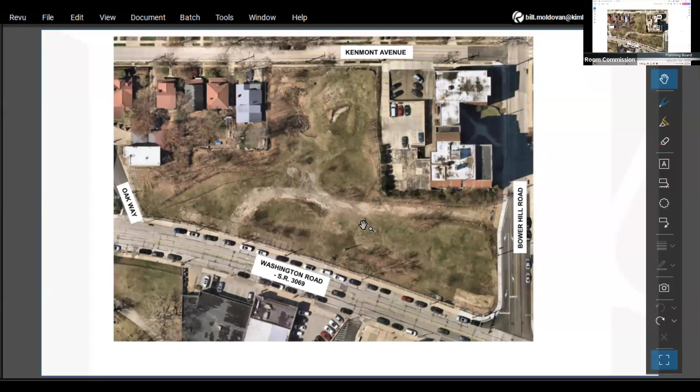It's currently in a vegetated, undeveloped condition. We also had a survey of the site conducted as part of our work in progress, shown on the following page. You can see the property boundary in dark black, again showing the boundaries to each side. This plan view shows some existing contours.

We've got elevation change. Can we get that screen? Someone's got to change the slide. There we go. We do have an elevation change, on the high side Washington Road, on the low side Kenmont. I take it everybody's familiar with this particular property, so it is a challenge from a grading perspective, but we believe our concept plan is made for this topography and this site.

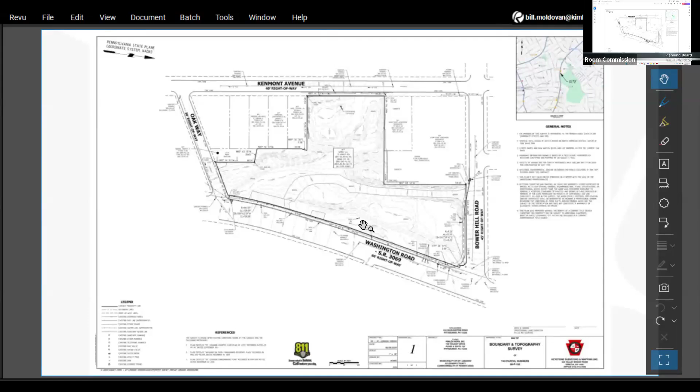We're going to show you a lot of information here in the form of plan view. We have some sections through the site to start to depict what we're proposing from a grading standpoint. I anticipate getting through all of that, and as you have questions, we can go back to some of those slides if you don't mind.

So we have a buried level of parking as the first story of the 2 proposed condo units, and then 4 levels of living. That first level of living, floor 1, is going to exit and enter onto Washington Road. On the back side of the units, facing Kenmont, you'll have access to the half-buried bottom floor of parking. Each unit has 24 parking spaces.

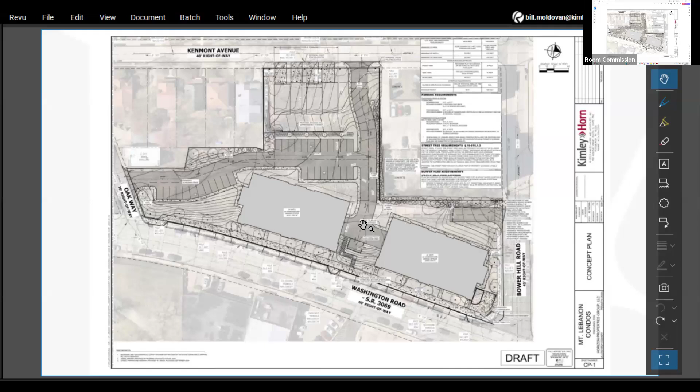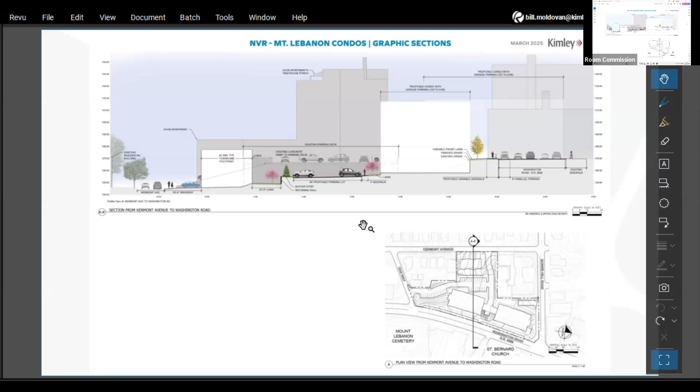The larger massing of white on the right-hand side is the proposed condo unit. The parked cars facing that condo building will face into one level of parking. This gives a good depiction of the fact that Washington Road sits about 11 feet higher than the parking in the middle of the site.

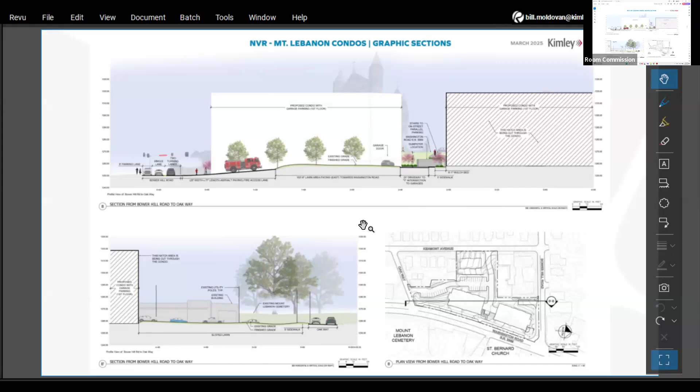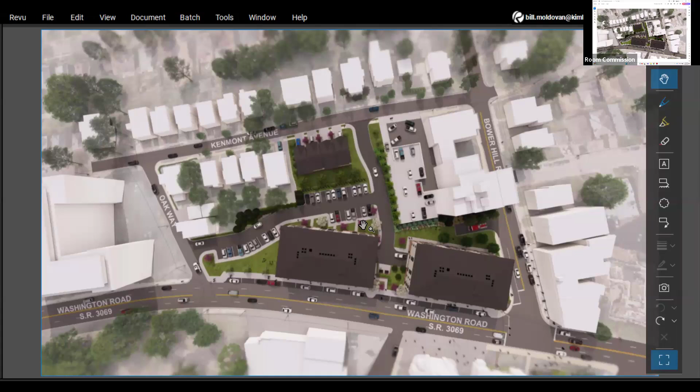Now we have some rendered views of our proposed concept plan. This starts to show the sidewalk connections through the site and the buffers being proposed, not only between the existing residential along Kenmont but also the Avon Court apartments along Bower Hill Road. You can also see the connection between Washington Road, the parking entrances, and the emergency vehicle access.

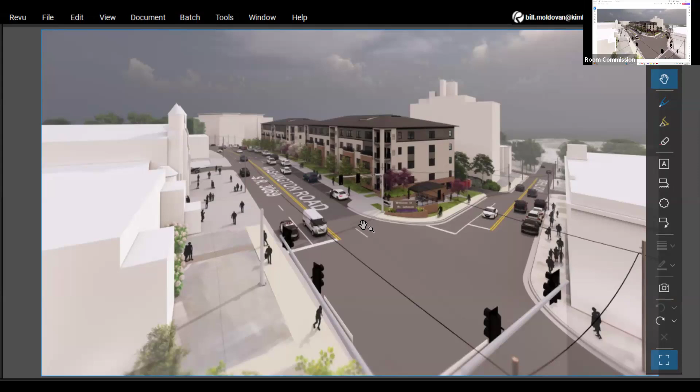We will work with the municipality to understand what that looks like. We just want the ability to not only introduce our project as cars are coming along the corridor, but also couple that with a public gathering space at that intersection.

This is the view from the intersection of Bower Hill and Washington Road, looking south, with the proposed development on the left. This is a view looking from Oak Way north on Washington Road, with the development on the left-hand side as well. And this is the entrance—you can see the entrance to Oak Way.

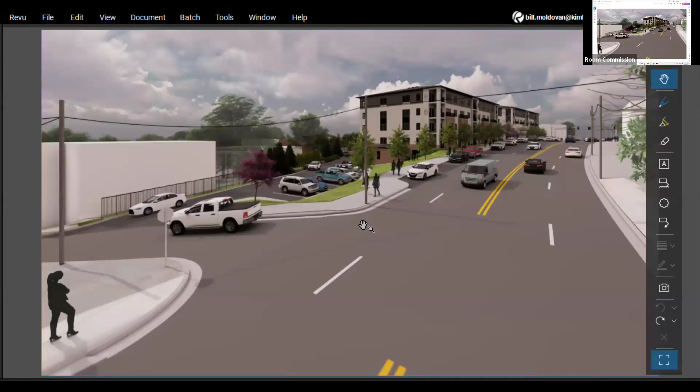This is probably an important place to show you that from a fire and emergency service perspective, we looked at fire trucks coming from the fire department, and we confirmed that the fire trucks would be able to navigate that turn onto Oak Way and then into the development.

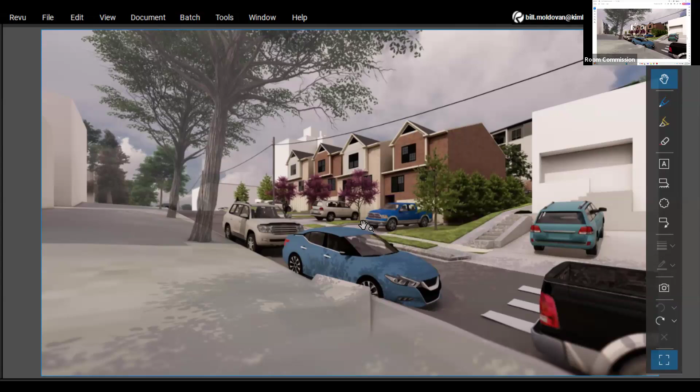This is a vantage point from Kenmont, on the opposite side of the street, looking into the development. These are the 4 townhomes. As you can see, the scale of the townhomes fits with the rest of the scale of the existing buildings. This is a good vantage point to show that, at a pedestrian scale, they block the larger townhome or condo buildings in the background.

And this is a bird's eye view from the intersection of Bower Hill and Kenmont, with the townhomes in the foreground and the condo buildings in the background. You can see the ramp that comes into the Avon Court apartment top deck garage.

And this is the next view I'll show you. This is the location that we discussed with that adjacent property owner, having some grading easements, allowing us to remove their vegetation and plant new in there for some screening.

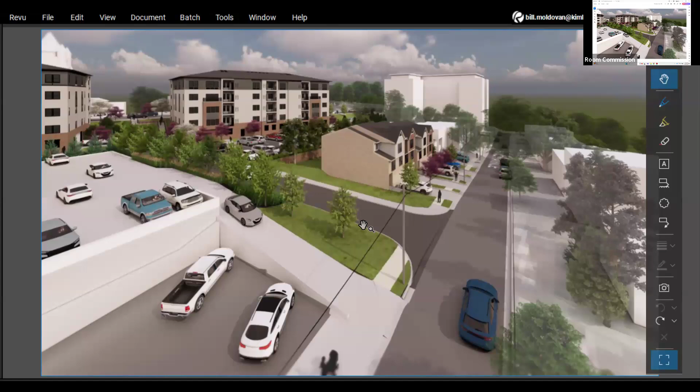And then this is a view from standing on that deck, looking into the site. This gives a good description of what that coordination was. In the background, in the corner of the parking deck, the top of the parking deck, the Avon Court parking deck, there's a small curb.

Right now, in existing conditions, there's a 5-foot-high parapet wall holding up some earth behind it. So we'd be looking at stripping that parapet wall down and regrading that earth there to smooth that transition between the two properties.

And this is a top view. We felt it was important to show the board what we had intended from a connection between Washington Road and the rest of the site beneath.

And this shows the orientation of the dumpsters or the trash enclosures, that white truck on the bottom of the screen there coming out—that would be exiting one of the parking garages. There's another parking garage entrance on the opposite side of that hammerhead intersection. And here you can see a sidewalk connection.

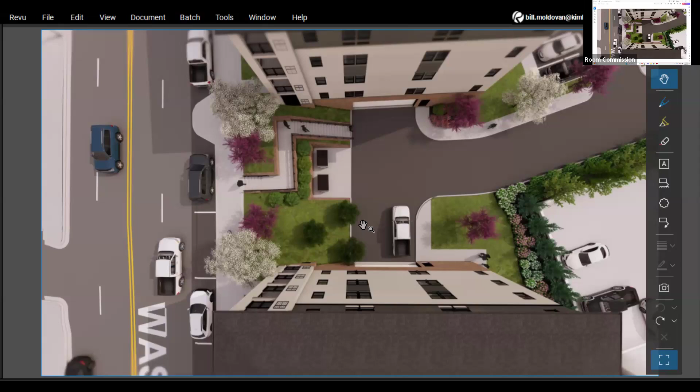And then this is the last image, looking from those steps coming down from Washington Road towards Kenmont.

I'm going to back it up one slide if you don't mind. We did put together a fly-through, kind of giving you a better understanding of the site.

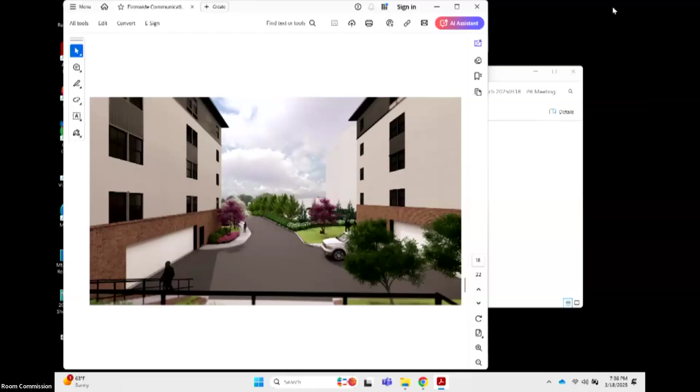So if we can minimize this, and at the same time, I can— I don't know, we can push play at the same time, maybe. It is, yeah, it's the top one. Can you see that? Yeah. That'd be better. Yeah.

Does 4 stories go higher than St. Bernard's Church across the street? Yeah, we'll have questions after the presentation.

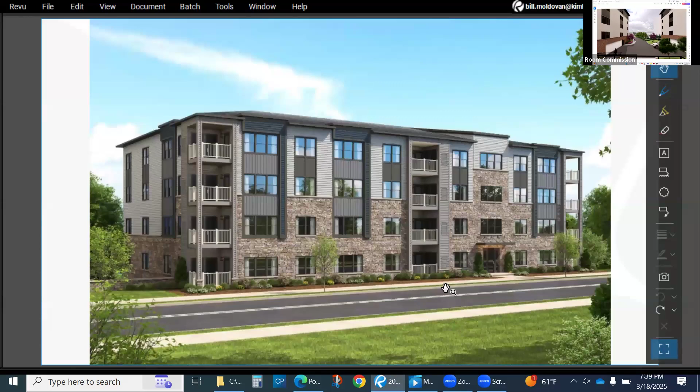And this is a rendering of the proposed architecture that we're looking at. Stone, brick facade for a portion of it, and then looking at paneling above that. But looking at trying to match the context of the surrounding architecture and community.

This shows you the 4 stories of living space. So this is what you would be seeing from Washington Road. And we have some floor plans here as well, but there will be an entrance to a vestibule and common area on Washington Road for all residents to get from the streetscape or street level into the condo building.

We're also proposing that there'll be 3 units on each building that face Washington Road. So we'd be looking at allowing them to have access from their porches as well. That was one of the questions that we had received from the fire department and Rodney Sarver, in regards to just access and fire safety.

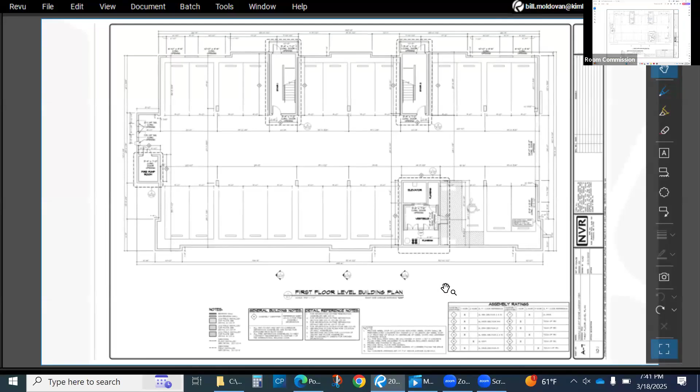And then this is just a floor plan of the ground level, first floor, the entry right there on the bottom to the vestibule, and the rest of the common area for access to the first floor units. That entry would be, again, on Washington Road.

Those are the presentation items that we had for you today. Like I said, we've got NVR, the builder, architect online. I can answer any questions about site planning, civil.

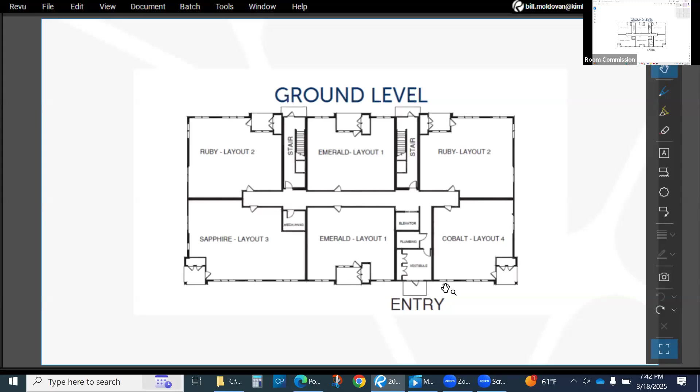After tonight, our next steps would be to consider an application for preliminary land development and a conditional use for the alternative parking. Another next step would be to schedule a meeting with the PADEP and the Conservation District to discuss stormwater management. We've done preliminary stormwater calculations on the site. We have an idea of where we think the stormwater management will go. It'll be a subsurface system, and I've talked to Dan about being part of those conversations. Moving forward, we understand where stormwater goes existing, where the municipality wants post-development stormwater to go. So that'll be a big charge moving forward as well.

So you have us here. We'd be glad to answer any questions, jump through any of these things, back up and help you understand. Thank you. We appreciate you guys coming in early and getting this in front of us as soon as possible. Nice presentation, thank you for that.

Dan, do you have anything to add? No? Okay. Ian, do you have anything to add before we continue?

I think just from a process standpoint, we mentioned it in the agenda item that this is kind of like step 0 in the process. Step 1 in the process is filing a formal land development application. So for those members of the public here or those watching online, this is not their formal land development application. This is their concept plan. They're presenting it to the board tonight to get some comments and feedback from the board in advance of filing that formal land development application. So there will be many more public meetings, public hearings, all those kind of things as part of the approval process for this. This is more or less step 0 of presenting the initial concept plan for feedback.

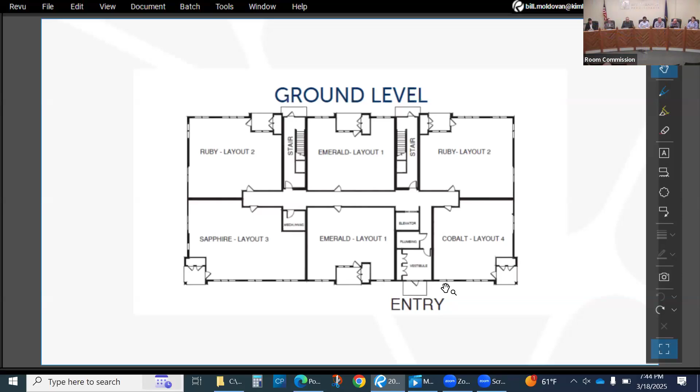So with that said, I'll turn it over to the board if the board has comments, questions, or feedback for the developer. I do, I have a couple questions. Can you go back to the rendering, or maybe it was the beginning of the animation from the corner of Bower Hill and Washington?

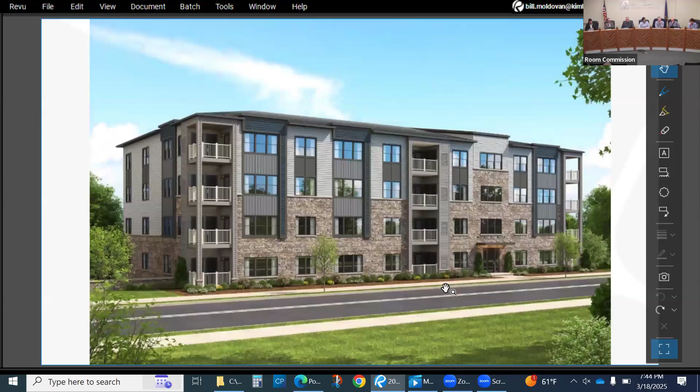I think one of the challenging things about this site is that there's a lot of fronts. The way the plan looks to me right now is that you've articulated the Washington Road side, but we just switched to that other view where you show the two parking garages. It looks like it's not addressing that there's multiple fronts to this building and that all the articulation is on one side, or potentially on the two long sides. So this side is really such an entry point just to Mount Lebanon, but also to your site, and it just doesn't seem like it's very special. It feels like it's kind of the side that's supposed to be hidden by trees. The same goes for the two inner sides where you're facing the parking garage, and then the exact opposite side where you're coming northbound on Washington. They all feel like they're just underdeveloped.

The next comment I had was asking you about the stair that's by the dumpsters in the middle. What is that going to, and why is it there? It's connecting the parking below with Washington Road. Does it need to? Because it feels like you're inviting, well, one, a view of the dumpsters. You've opened up that where it could be screened better and you wouldn't see it, especially since there's restaurants and a gym across the street. But it also just feels unnecessary because I don't know who would be using that. If people are coming and they're parking in the building, they're going in and up. And if they're exiting the front of the building, they're going out onto the street. It seems like a missed opportunity for a good landscaping barrier or some type of site amenity that's activated along Washington.

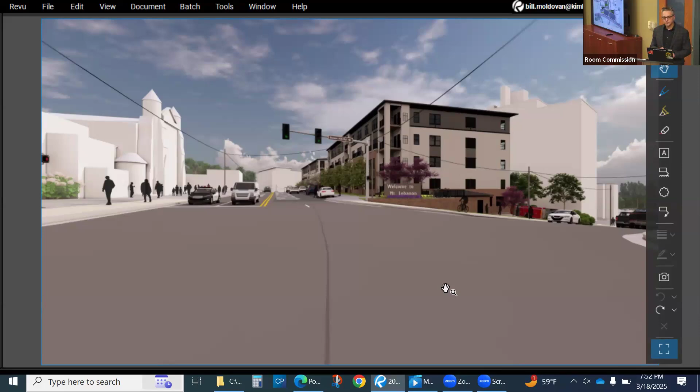That landscaping looks to have 3 or 4 larger plants, and then a bunch of small stuff in between. Wouldn't that be more of a green wall, something you'd want to put in between? That's what John's trying to get into. It looks like there's a lot of landscaping there, but it's hard to tell if it's going to block the headlights. I think it will block the headlights, yeah.

I would also add, because of the adjacent existing houses as well, making sure that the screening addresses not just the ones on your property, but the ones next door. The only adjacent property that we will have difficulty screening is the building on Oak. It's almost a zero lot line to our lot, so we're showing a fence there between our property and that building.

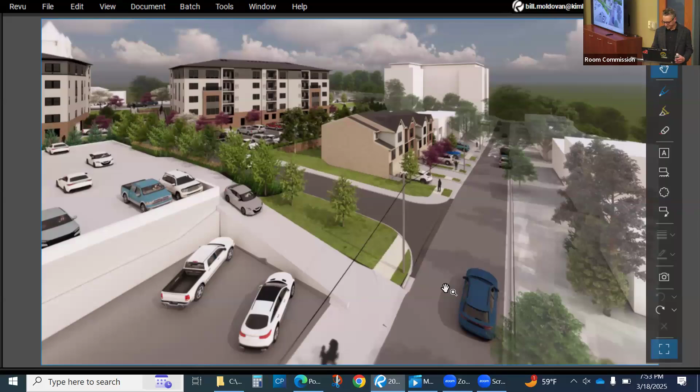And you can see that fence between our property and adjacent building. I'm not sure with regards to its function right there, whether or not it's a screening fence. That's another technicality we would work through with the municipality and this board as we move forward.

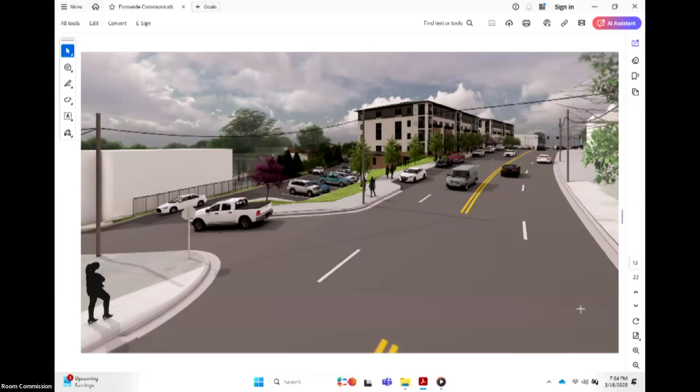And that Oakway entrance is right turn in, right turn out only? It's not a left turn? Right now it's shown as full access. From a traffic engineering standpoint, to date we've done trip generation to provide information to municipal staff regarding the requirement for a traffic study for this project. That question is going to come up, and we're going to have to do additional work to show the municipality why it can be full access, because the left turn there seems like it's going to cut off the inbound traffic going down the hill on Oakway. Right now we expect to have that discussion and provide more information to you.

So this view also points out a question I have, and it's the whole roof. Because the roof almost seems like an afterthought, like you just put a little cap on the building. I don't know whether that was because you were restricted by a certain height limitation or what's going on, but it doesn't feel like the roof belongs to that building.

I know Adam's on the line from an architecture standpoint, and NVR from a builder standpoint. My understanding is it's their standard roof for this particular Mosaic, which is the name of the structure. I don't think it was just placed on - it's something that they've built elsewhere.